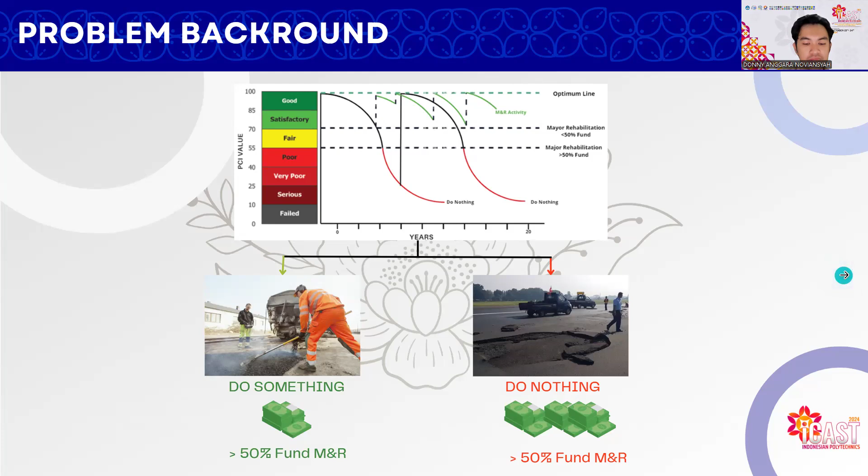The methodology of this research: first is the pavement survey. This method is used to assess the condition of the pavement. In this study, we are going to use the pavement condition index method. The second is the pavement condition. The survey results were analyzed to determine the overall damage condition, classifying the pavement according to the types of damage observed. The third is the pavement standard. The PCI values, which represent the condition of the pavement at Ahmad Yani International Airport runway, were scored against the standards set by FAA.

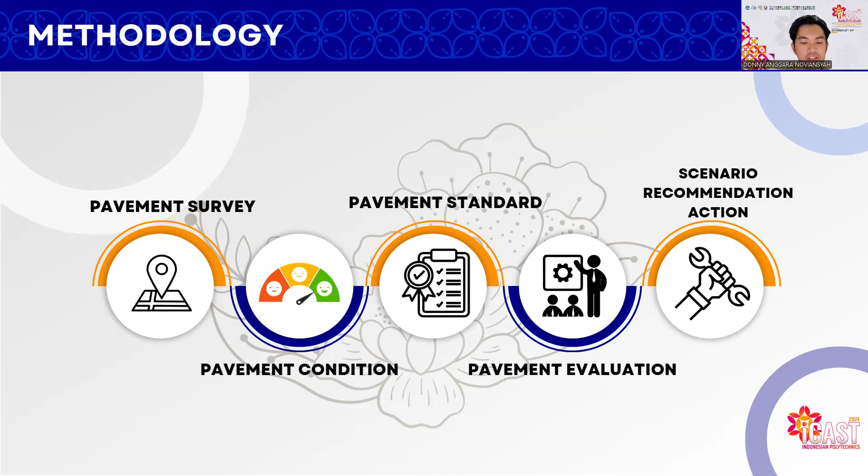The fourth is the pavement evaluation. The standard values were used to determine the appropriate action to take based on the PCI value criteria. And the last is the scenario recommendation, used to determine the best course of action based on the PCI value, categorized as do nothing and do something, in accordance with FAA standards. From the chosen scenario, the most effective and appropriate method for addressing the issues was identified.

For the analysis of the PCI survey, PCI data was obtained and analyzed through both survey and mathematical methods. The following steps outline the PCI analysis process. As a first step, a PCI survey was conducted on the runway of General Ahmad Yani Airport, which has a length of 2,560 meters and width of 45 meters. To obtain more detailed damage data, the survey was carried out in intervals of 10 meters, resulting in 256 samples.

In the next step, after identifying the survey area, the damage density measurement was taken based on the ASTM standard for PCI survey, and the damage on the runway was categorized by item in accordance with these standards. In the next step, based on the survey results, the PCI for the year 2024 was calculated at 70, or satisfactory. This shows a decline from the previous year. PCI in 2023 was 74.

And then the last step, to accurately determine the reduction in PCI, data gaps from the years 2019 to 2022, during which no surveys were conducted, were filled, assuming the PCI in 2018 was 100, or good, as the post-construction condition. Interpolation equations were used to estimate the PCI values for 2019 to 2022 using the closest available data.

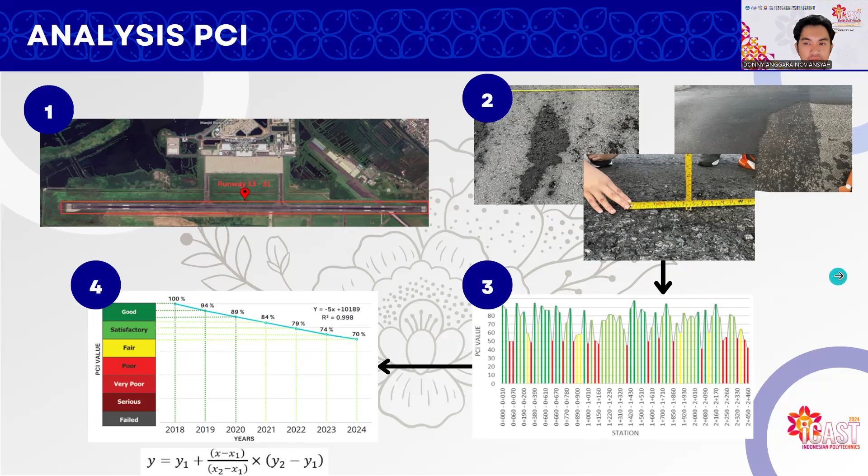Analysis for maintenance and repair scenario: determining the scenario approach is based on the existing PCI value from the previous method, which is then used to identify the type of treatment, such as do nothing or do something. Determination is made by referring to the repair experience at Ahmad Yani International Airport and the FAA regulation regarding repair standards. The first method is overlay and leveling.

Repair with overlay and leveling methods is carried out under the do something scenario, based on the repair experience conducted by Angkasa Pura 1 in 2017 and 2018. This was performed when the PCI value was 59, or fair. The second is the overlay method, performed under the do something scenario following the FAA standard, which recommends repairs when the condition is satisfactory. According to the PCI data, this was done when the PCI value was 70, or satisfactory.

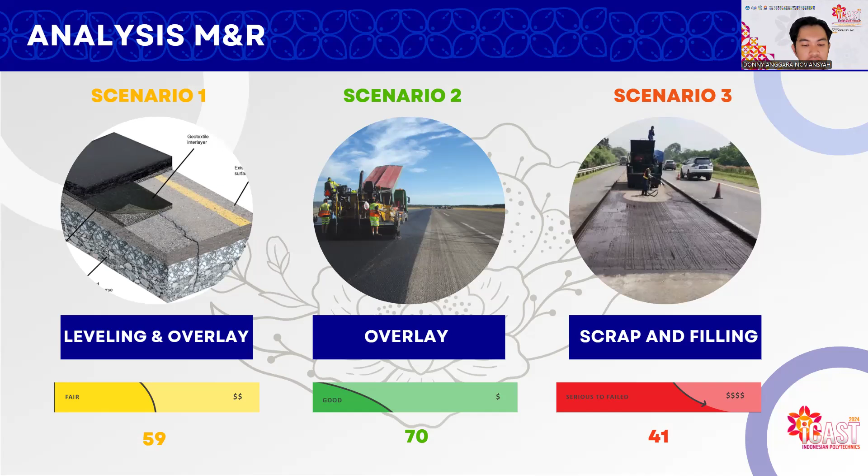And the last is the scrape and filling overlay, or SFO. This method is conducted under the do nothing scenario, assuming that the pavement needs to be reconstructed due to its poor condition, with a PCI value of 41, or poor.

The next analysis is the cost budget, to determine the cost used in running the methods in scenarios 1, 2, and 3. Several stages are used as follows. First, the determined scenario is used as a reference for deciding the timeline for major repairs, which will be carried out every 2 or 3 years, along with some minor repairs in the intervening years.

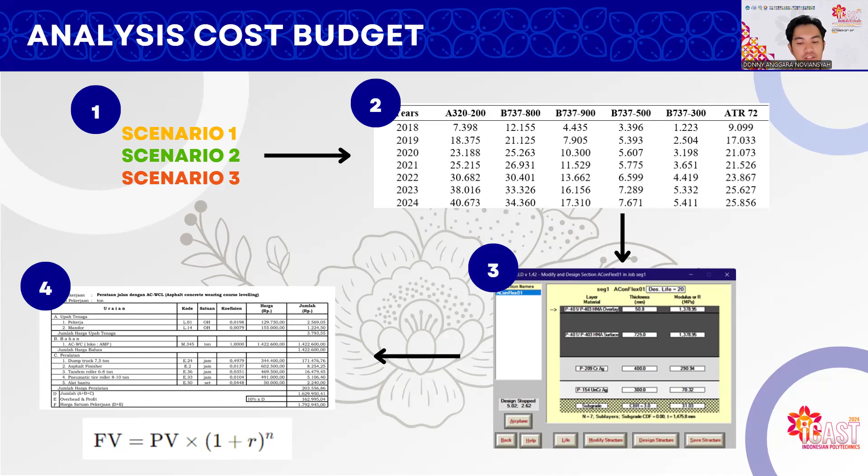Next, to determine the thickness of the layers used in the scenario implementation, flight data from 2018 to 2024 are used for forecasting future increases. Third, the flight data are input into the FAARFIELD and COMFAA programs, incorporating the existing condition after the 2018 construction, following the previously determined scenario. Lastly, based on the thickness obtained, a cost analysis is performed referring to the 2024 ASP. The 2024 inflation rate is assumed for future inflation, which is then applied in the future value formula to estimate future increases.

The results of this research: first, scenario 1. In scenario 1, using the overlay and leveling method, repairs are scheduled for 2026 and 2035, when the condition declines to fair, PCI 59, with maintenance performed in the following years. The total cost for repair and maintenance is estimated at 118 billion.

In scenario 2, using the overlay method, repairs are directly scheduled for 2024, 2031, and 2038, when the PCI condition is 70, or satisfactory, with maintenance performed in the following years. The total cost for repair and maintenance is estimated at 66 billion rupiah.

In the last scenario, using the SFO method, reconstruction is scheduled when the pavement is in poor condition, with repairs performed in 2029 and 2041, when the PCI condition is 41, or poor, and maintenance in the following years. The total cost of repairs and maintenance is estimated at 122 billion rupiah.

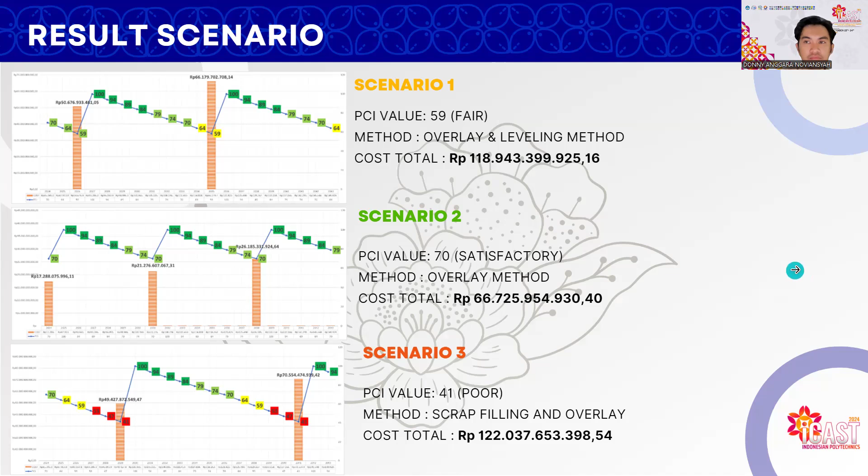In conclusion, the PCI reduction model for General Ahmad Yani Airport, based on a linear equation from 2018 and 2024 data analysis, results in a linear declining equation with a final PCI value of 70, classified as satisfactory. Next, the pavement distress observed in the PCI survey at General Ahmad Yani Airport includes bleeding, raveling or weathering, cracking, and rutting. These are caused by aging pavement, heavy traffic, and environmental conditions.

And lastly, based on the PCI value reduction analysis, scenario 2 is the best option for cost optimization using the maintenance and repair method. In scenario 2, repairs are carried out before the PCI value reaches the fair category, reducing cost. The total cost in scenario 2 is 66 billion rupiah, achieved through a sustainable maintenance and repair approach with overlay and minor maintenance in the following years. The novelty of this scenario lies in the preventive and cost-efficient repair strategy, which can serve as a reference for sustainable improvement at the airport.